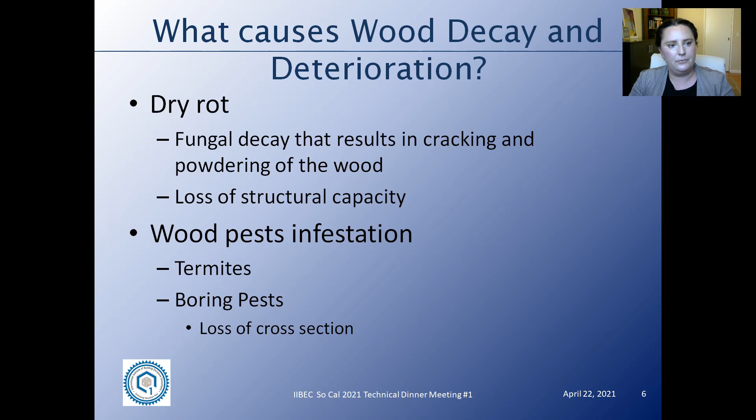So decay, dry rot, as it's less formally known, requires three different things to occur. It needs a food source, which is the wood itself. It needs water, and it needs fungal spores. So dry rot is actually a fungal infection that is eating away at the wood. And the main thing that really contributes to this is the presence of water. When we're talking about E3s, those are specifically wood elements on the outside of the building. And fungal spores are in the air. They're pretty much everywhere and are blown with the wind.

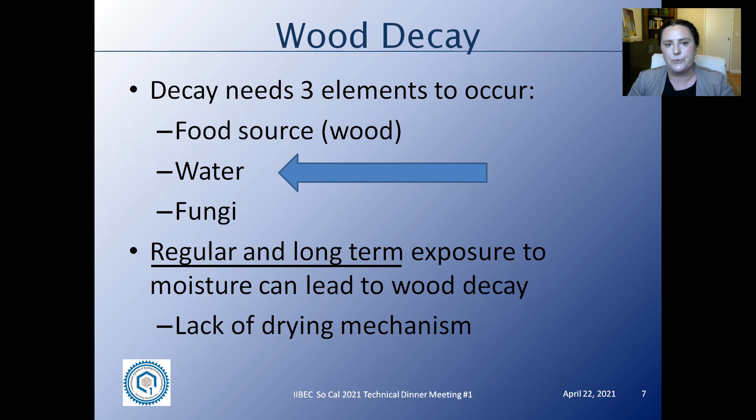So the main thing that we can control and that we can look for is the presence of water and moisture. Really it is regular and long-term exposure to moisture that can lead to wood decay. Essentially the wood needs to get wet and not be able to dry out quickly. If you just have an exterior wood fence that gets rained on but is able to dry as soon as the sun comes out, you're really not going to get dry rot and decay like you would in an enclosed condition. So these E3s get water in through some kind of small opening or hole, and they do not have a good drying mechanism. The water will stay for a long period of time and cause this fungal decay.

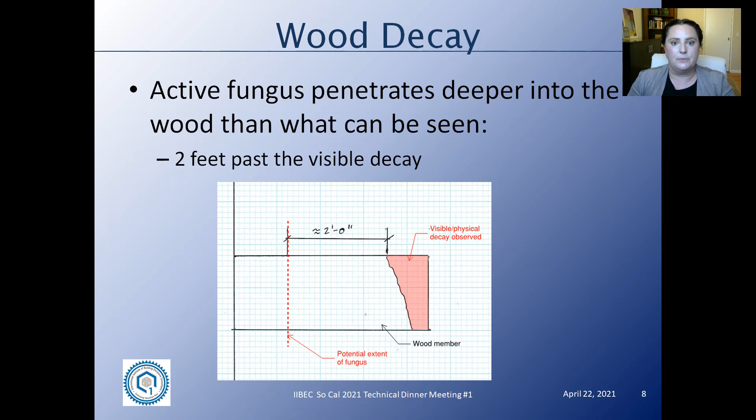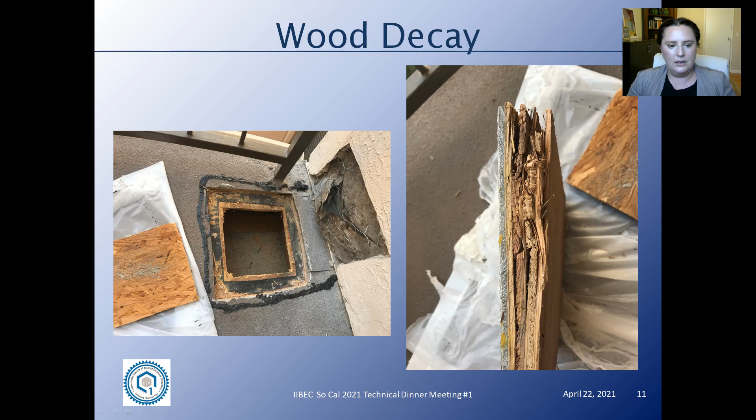So now let's talk about wood pests. There's lots of different types of wood pests. Main ones that we find here are termites and some boring beetles. They tend to be attracted to wet wood. And really, for these pest infestations, they need to be inspected by a certified professional. The certified professional will be able to provide treatment options for this.

But as inspectors, for the E3 inspectors, we can identify and look for some of the evidence that could indicate that there's a wood pest infestation. So the evidence really is termite waste, which is also called frass, and what I call wavy paint.

The termites like to get into the end grain of the wood, and they eat up through the end grain of the wood parallel to the wood. And so they'll eat underneath the paint a lot of times on the outside of the wood. And when they eat the wood and generate waste, it causes an expansion in volume, and it causes this kind of blistering that you can see in the paint. So I'll show some examples of that.

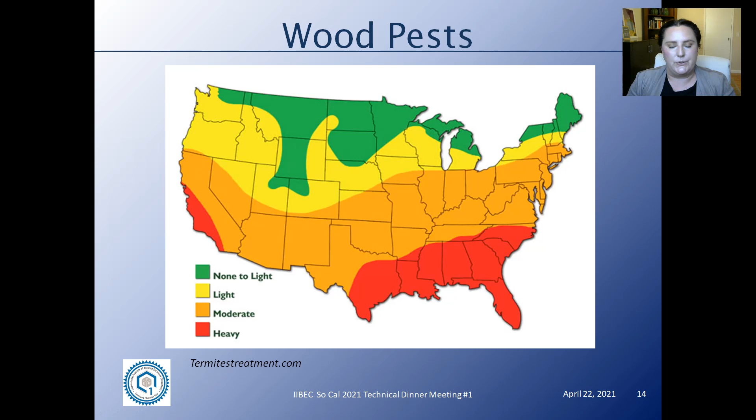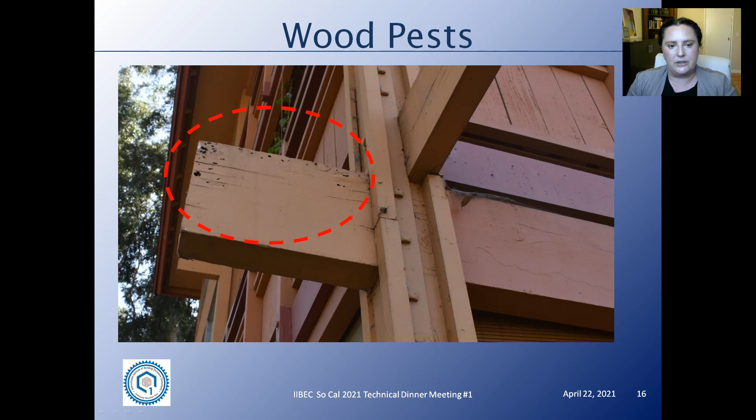Here's another good example. We've got some boring holes over here, and we've got a lot of paint flaking. And to the left, you can see the wavy paint areas. So these could indicate that there are actually termites that have gotten into this member and have eaten along the end grain and have caused little pockets of waste to form underneath the paint.

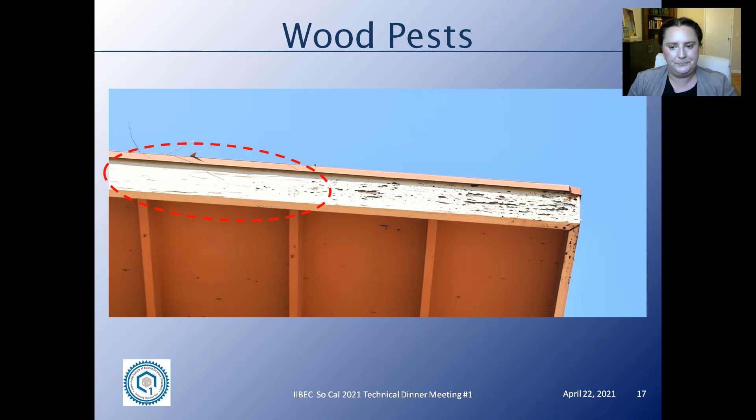And here's an example from my own house, actually, where the termites got in and ate up the end grain of this roof eave. And from the outside, it looks fairly normal. But as soon as you start cutting away, you can see that they've completely eaten away at the cross section. And this is how it weakens the wood, by removing actual cross section of wood. So you're losing that structural capacity from your wood members.

So now let's go into the basics of E3, particularly the framing of the E3 elements and how that relates to inspection. So what areas should you be concerned about when you're looking at these different elements, and what areas should you be paying attention to on a structural basis?

So there are several different framing techniques, and there's really a couple typical ones that we see for these exterior elevated elements. First is cantilever. So that is the element actually cantilevers out from the building. Second is simply supported, and that can be done in a multitude of ways. One could be possibly beam and post supported exterior elevated elements, or ledger and beam supported elevated elements.

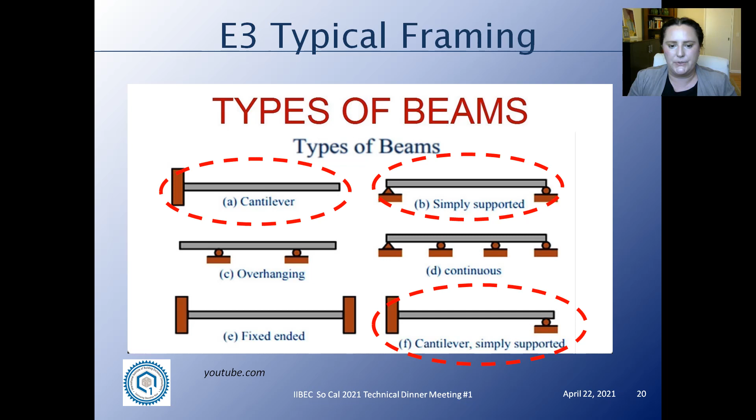And we also see quite a lot of cantilever and simply supported. So this is framed by cantilevering out from the building and then either a beam and post type support on the free end of the cantilever.

And when looking at the loading diagram on a cantilever, this is just a typical for a uniform distributed load on a cantilever beam. You can see that our max shear happens where the beam enters the building, so right at the support point at the building. And our max moment also happens at that point.

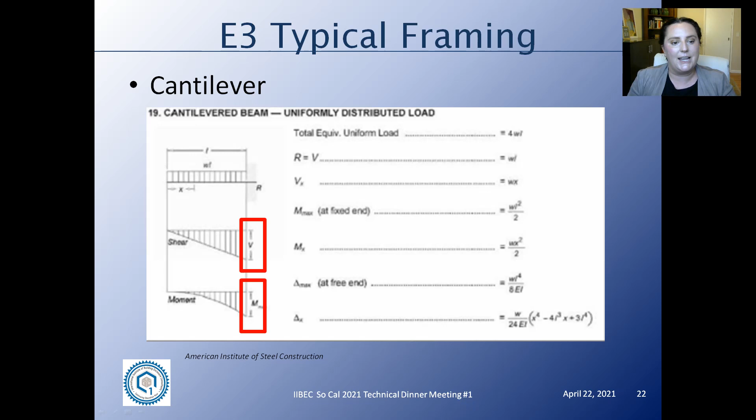So when looking at this from an E3 inspection type, we're concerned mainly with the structural capacity of the framing as it enters the building. If we have significant decay and deterioration where the beam enters the building at this point, we could have a very problematic condition, because that is where the highest load and the highest moment is happening within the beam.

So when you're looking at this type of framing, you should be concerned with where the supports are occurring, where the high shear loads are occurring, and where the moment occurs in the middle of the beam. One thing to note too is in terms of structural, right adjacent to where the support is, that's the concerned area, because your support is holding up this max shear here, but just to the left of it, just where the support ends, that's where you could have a catastrophic failure.

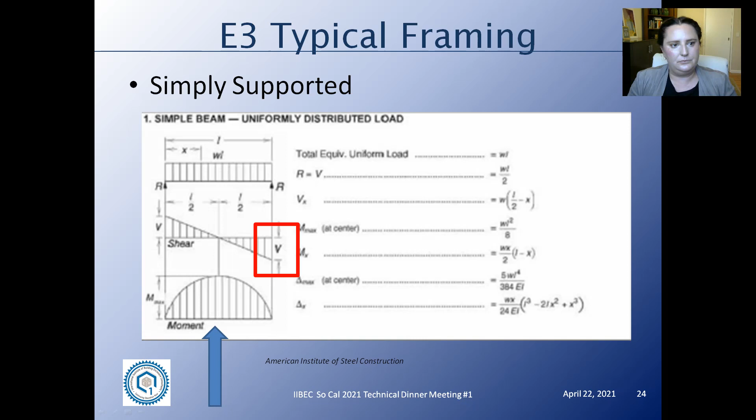And so when looking at the support and loading diagram for that, it's a little bit more complex. We have shear locations at the supports. We have high moment where the cantilever beam enters the building, but we also have a high moment in the middle of the span, and we also have a shear at the free end of the cantilever. So essentially, the more supports you have, the more complicated the structural framing is, the more areas you need to be concerned about when you're inspecting it from an E3 inspection point of view.

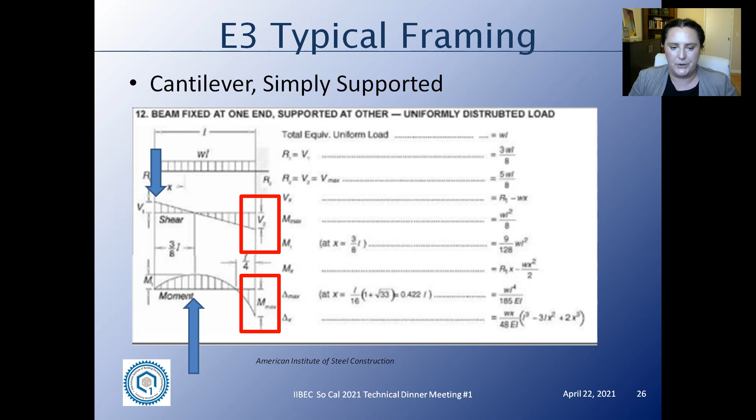The higher the amount of supports, you have an increase in redundancy. So in a cantilever situation, if you have cantilever joists fail, you have less redundancy to help keep the E3 element from collapsing. When you have multiple supports, things like simply supported or the cantilever and simply supported type situation, you have a lower chance of an extreme catastrophic failure because you have more redundancy in your support system.

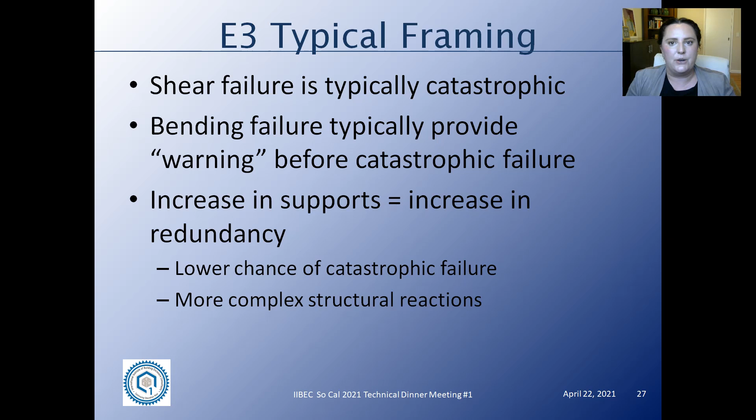Typically, when it comes to different types of failures, shear failure is considered more catastrophic. There's usually less of a warning provided on that. And a bending failure typically provides some type of warning before a catastrophic failure. So that means like extreme deflection in your joist, sagging, that kind of thing. So usually the bending failure is less catastrophic because you get a warning system, you can see it happening before you get an extreme failure.

So let's look at the different railings. These railings are also included in your E3 inspections, which we'll talk about a little bit more later. And they are considered part of the life safety. So a lot of times people lean on these railings. They're meant to prevent people from falling off of these balconies. So these are also very critical areas that need to be inspected as part of the E3 inspection.

So there's really two different kinds of framing for a railing system. There's the fascia supported or face mounted railing, where it's secured through the face of the balcony or the E3 element.

And so here's an example of a detail. And if we look at the loading on this and you push at the very top of the railing, it causes a moment down at the anchor points. And a moment also is considered a couple force, or it's a coupling force. So it results in a tension and compression force within the anchor of this framing.

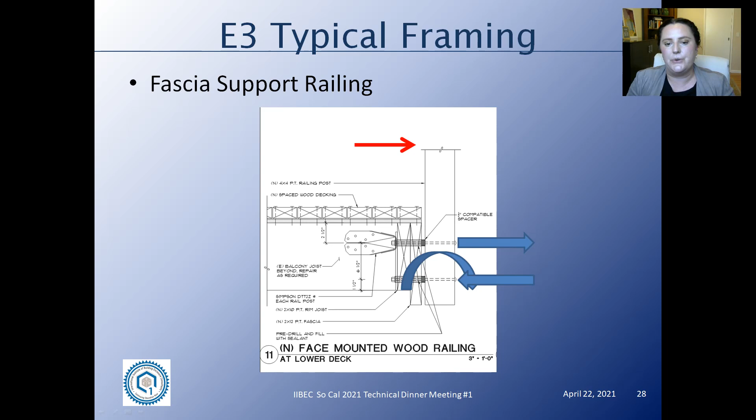So when you're looking at and considering where would the structural concern be on this balcony, you really want to look at these anchor supports here and the wood framing members that are connected to these supports. So if any of these wood framing or any of these anchor systems have some kind of decay and deterioration, that should be noted as a concern that needs to be addressed at some point.

And again, let's look at a top supported railing. This is the other style. Typically, this is done through base plates and individual post or a shoe type railing system, and it's secured through the top walking surface of the deck.

So structurally, when we look at this and we're pushing that railing over, it creates a moment down at the base, which results in a compression and tension force within the anchors itself. So again, we need to look at these anchor bolts and at the surrounding wood members that are supporting this railing to see if there's any decay or deterioration when looking at this.

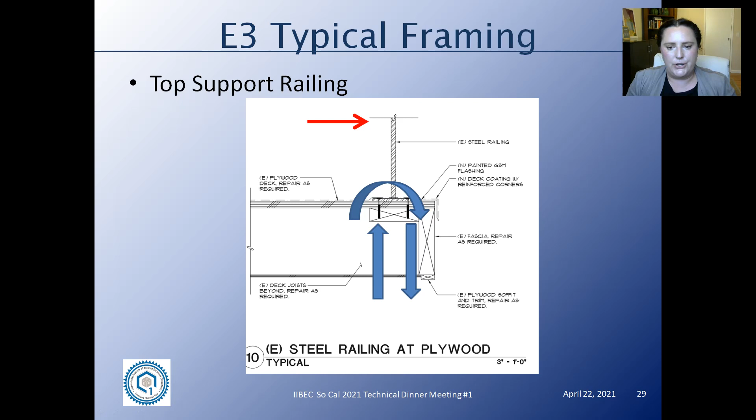One other item I want to note is that when we're looking at guardrails, we also need to look at the panels in the guardrails. So between the framing support post, the panels are there to prevent people, again, from falling off a balcony or going through a balcony. So those also should be structurally sound when we're doing these inspections.

So looking at the E3 typical framing, there's decking, which can consist of a lot of different types. There's either 1x2 wood decking, composite decking, which is still wood-based, plywood sheathing with a waterproofing layer and a concrete topping. Sometimes also I've seen tile topping, and plywood sheathing with traffic coating directly on the plywood sheathing.

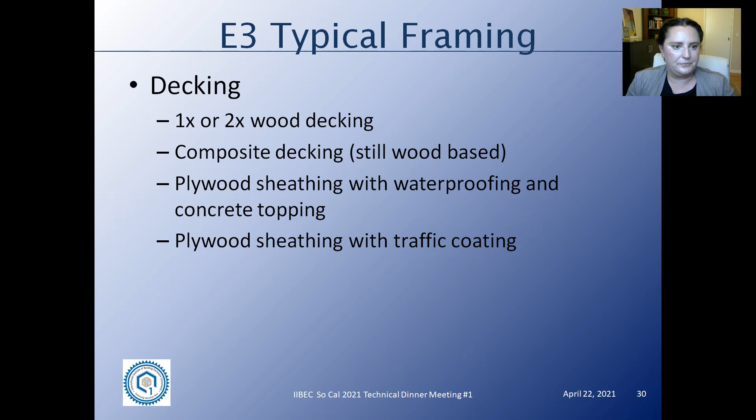Supporting members can vary as well. They're typically around 2x or 4x joist or 4x, 6x beams and ledger type situation. There could be post, 4x or 6x wood post with a concrete post-based foundation, or they could also be steel post. Those are not required as part of the SB 721 and SB 326 because they're steel. So we'll get a little bit into that when we're talking about the different Senate bill requirements.

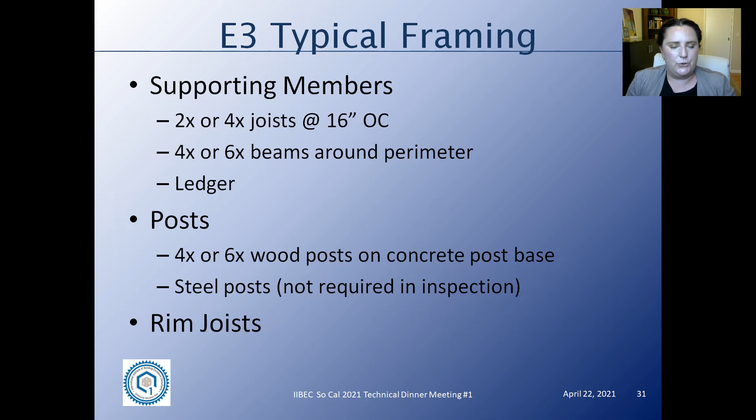Rim joists a lot of times are part of this. Fascia, blocking. If you're looking at stairs, you can have stair stringers, which could be 2x wood framing, and risers and treads, which could be 1x or 2x wood.

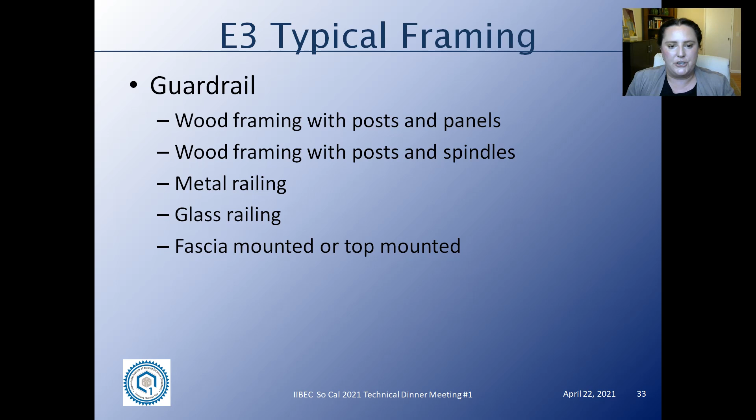Guardrail can consist of a lot of different types. Wood framing with post and panels, wood framing with post and spindles. You could have a completely metal railing, glass railing, and fascia mounted or top mounted typically is the framing part. There's lots of different connectors, joist hangers, nails, lag screws, bolts, etc.

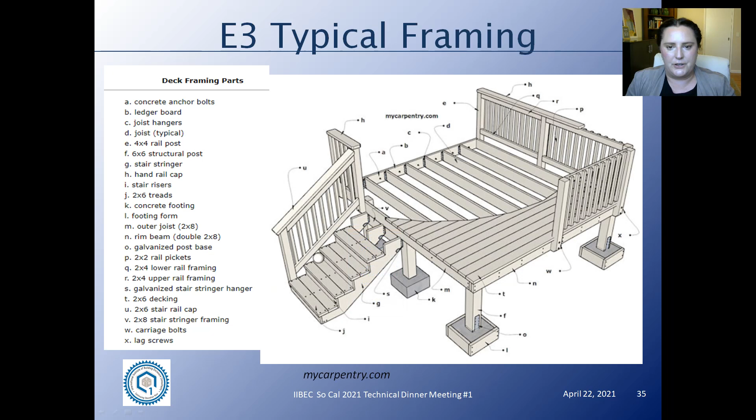And here's kind of a good diagram that shows all the different types. As you can see, this guardrail is fascia or face-mounted guardrail. It's a post and beam type framing situation with post base, foundation. This is the ledger in the back here where the joists are hung off of. So that's the basics of framing and kind of the structural basics of how these E3 work.

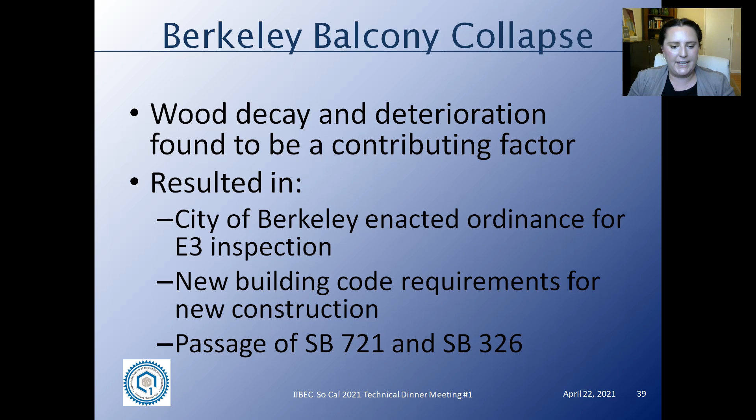The first thing was the City of Berkeley enacted an ordinance for E3 inspections. There were new building code requirements for new construction that was enacted in the 2017 emergency addendum and is now fully part of the 2019 California Building Code. And it resulted in the passage of Senate Bill 721 and Senate Bill 326.

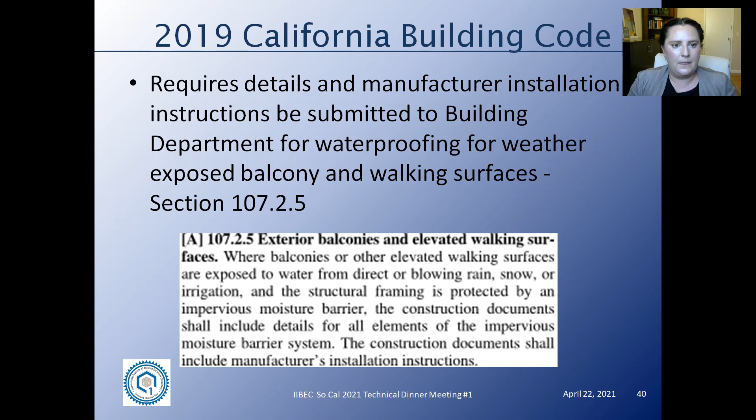So let's briefly look at what the new code requirements are for new construction. So it requires details and manufacturer installations for waterproofing for the weather-exposed balconies and walking surfaces to be submitted to the building department. It also requires either a building official inspection or a special inspection for the waterproofing portion of weather-exposed balconies. And the municipalities can either include it as part of the building inspector's job or require special inspections. And we have actually seen some municipalities enact special inspections.

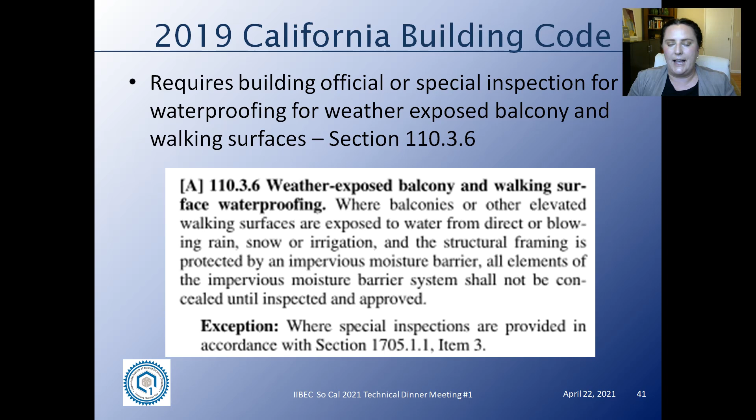And those special inspections are required under Section 1705.1.1, Item 3, which requires materials and systems to be installed in accordance with manufacturer's instructions that prescribe requirements not contained in this code. It now requires venting in enclosed soffits underneath balconies and exterior elevated walking surfaces.

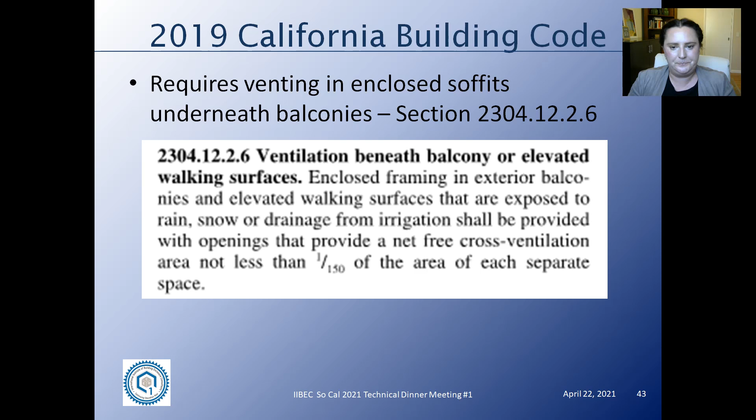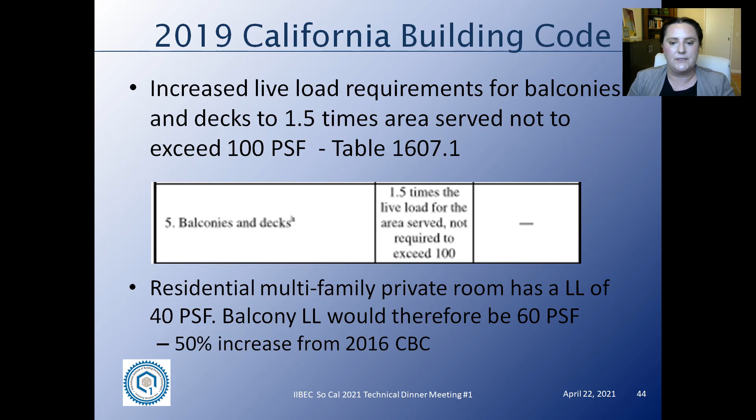And finally, it resulted in SB 721 and SB 326. So these are 2 Senate bills that were passed to require regular inspections of exterior elevated elements. First, we're going to go into some definitions. So what is an exterior elevated element?

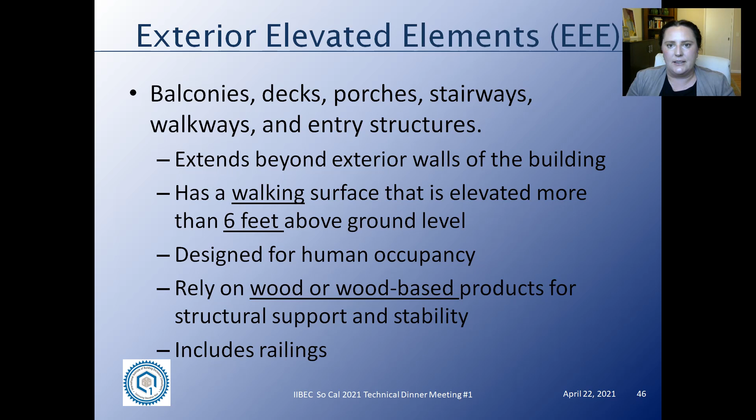This includes balconies, decks, porches, stairways, walkways, and entry structures that extend beyond the exterior walls of the building, has a walking surface that is elevated more than 6 feet above ground level, is designed for human occupancy, and it relies on wood or wood-based products for structural support. Railings and guardrails are also included in these EEE elements, even if they are not wood-based. So if you have a metal guardrail on a wood-based exterior elevated element, then that is considered part of the Triple E.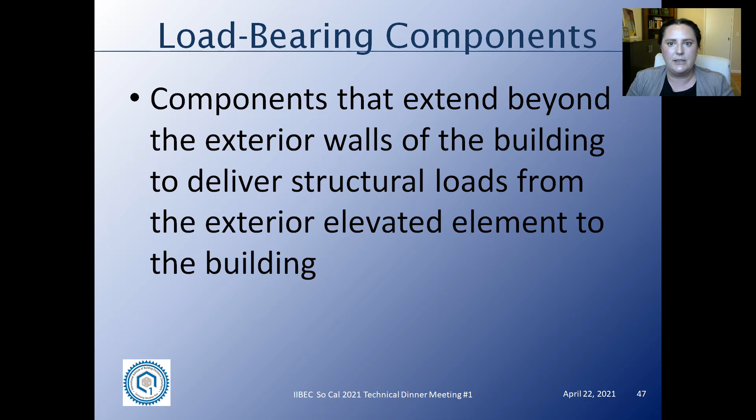And then what are load-bearing components? These are components that extend beyond the exterior walls of the building to deliver structural loads from the EEE to the building. So that's all the structural framing that holds up these EEEs. And associated waterproofing elements is defined as items that protect load-bearing components of the Triple E from exposure to water and the elements. So this is flashing, membranes, coatings, sealants, etc.

So first, let's look at Senate Bill 721. So this was passed in 2018, and it requires inspection of Triple E's of multifamily residential buildings with 3 or more units. This excludes common interest developments, so condos and co-ops, etc., are excluded from the SB 721.

And as a direct quote from the bill, the purpose of inspection is to determine if the Triple E's are generally in safe condition, adequate working order, free from any hazardous condition caused by fungus, deterioration, decay, or improper alteration to the extent that the life, limb, health, property, safety, or welfare of the public or occupants. So that is the main purpose of this bill.

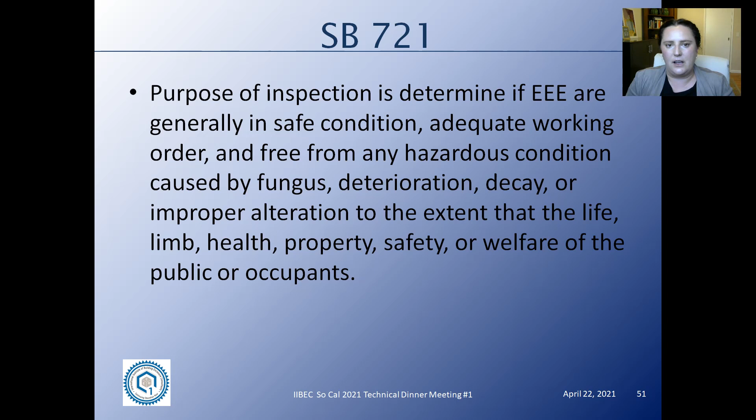It requires a minimum of 15% of the load-bearing components and associated waterproofing elements of the EEEs to be inspected on a building. The report is due to the owner within 45 days, and the owner is to keep a copy of that report for 2 inspection cycles. And it should be noted that the report timeline does not matter how many EEE elements are inspected. If you inspect 3 balconies or 300 balconies, you still need to give the report to the owner within 45 days.

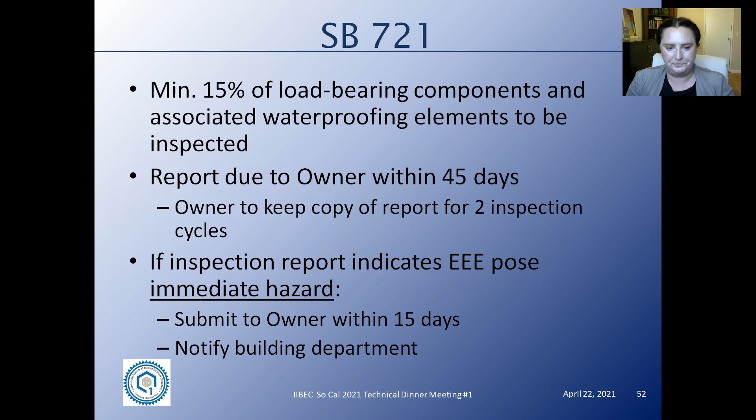If the inspection report indicates that one or any of the triple E's pose an immediate hazard, then you need to submit that immediate hazard report to the building owner within 15 days, and you also need to notify the authority having jurisdiction. These inspections can be performed by a licensed architect in the state of California, a licensed engineer from the state of California, a licensed contractor with an A, B, or C5 license with a minimum of 5 years experience, or a certified building inspector.

The inspections need to occur every 6 years, so this is an ongoing maintenance item that building owners need to do. And the first inspection needs to occur by January 1st, 2025. And the inspection entails a quote-unquote visual inspection of load-bearing components and associated waterproofing elements of the EEEs.

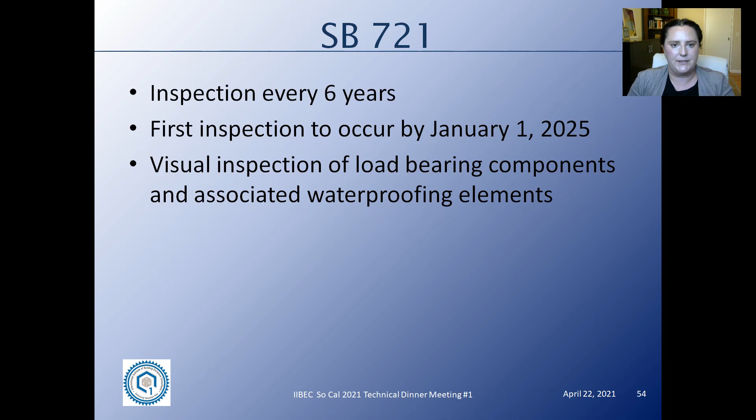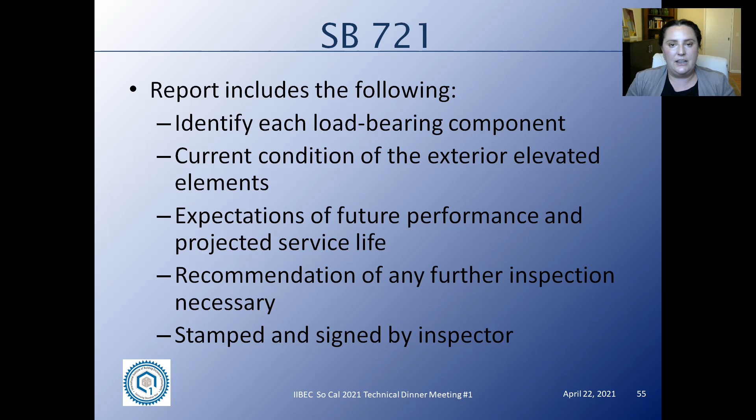The report needs to include the following. Identify each of the load-bearing components, so a diagram of the structural framing is a good idea. It needs to say what the current condition of the EEE is, expectations of future performance and projected service life, recommendation of any further inspections, and it also needs to be stamped and signed by the inspector.

It also needs to include photographs, test results if you do any kind of testing on these elements, and a narrative of what was observed and what was inspected. And if any of the EEEs pose an immediate threat to the safety of the occupants, the inspector in the report needs to indicate whether restricting access or temporary shoring is necessary.

Following these reports, if there's any immediate hazards noted, then the owner needs to immediately start repairs or actions to limit access to that EEE. Any corrective work identified in the report needs to be completed within 120 days of an approved permit. If the owner is not compliant within 180 days, there are fees that can be implemented by the building department.

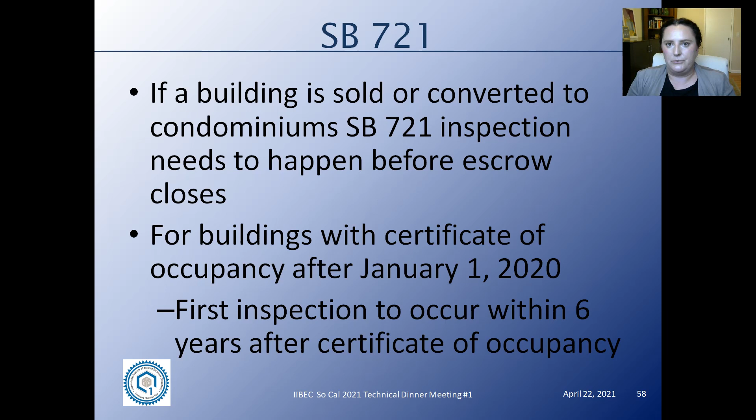If a residential building is sold or converted to condominiums, the SB 721 inspection needs to happen before escrow closes. And for buildings that were built after January 1st, 2020, the first inspection needs to occur within 6 years of the certificate of occupancy. So this is something to note too. The age of the building does not matter for 721. Even brand new buildings are going to require these regular inspections to occur.

So now let's look at 326. 326 was passed to close the gap that 721 included with respect to condos and common interest developments. So 326 is the same EEE inspection requirement for common interest developments. This was passed in 2019. And again, it's inspection of the EEEs of multifamily residential with 3 or more units. So if you have a duplex, it's not considered part of this requirement.

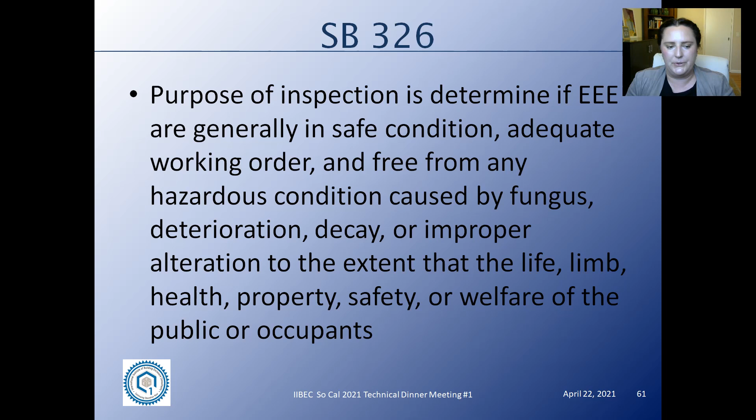Again, the purpose of the inspection is to determine if the EEE is generally in safe condition, adequate working order, and free from any hazardous conditions caused by fungus, deterioration, decay, or improper alteration. A little bit different: the amount that needs to be inspected is a random, statistically significant amount. That means the amount that can provide 95% confidence with a margin of error of plus or minus 5%. So this Senate bill leaves it up to the inspector to determine how much needs to be inspected as part of their professional judgment to provide 95% confidence.

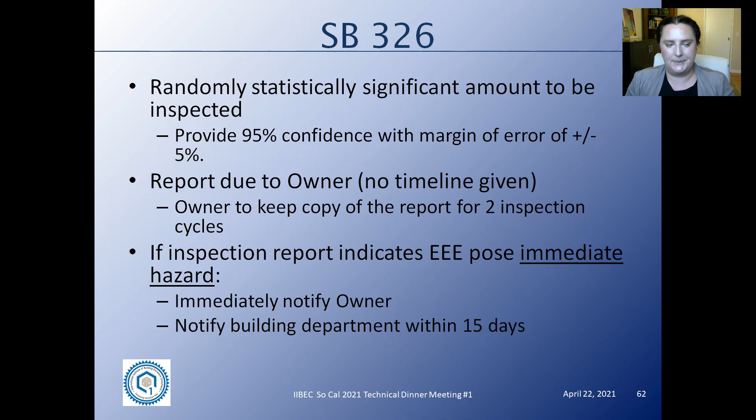The report is due to the owner. However, there's no timeline given, and the owner is still to keep a copy of the report for 2 inspection cycles. And by owner, I apologize, I mean HOA or board. If an inspection report indicates the EEE poses an immediate hazard, you need to immediately notify the owner and notify the building department within 15 days. These inspections can be provided by a licensed architect or a licensed engineer in the state of California. The inspection cycle is every 9 years, and the first inspection is to occur by January 1st, 2025.

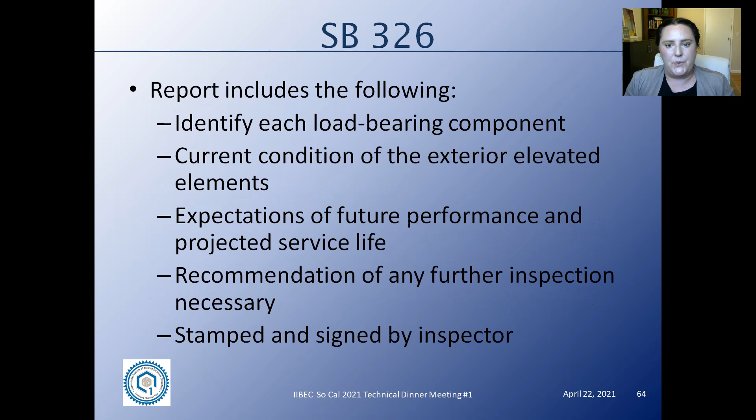And again, it's a, quote unquote, visual inspection of load-bearing components and associated waterproofing elements. And the report requirements are the same as for 721. And again, if any EEEs pose an immediate threat to the safety of the occupants, the inspector or the report writer needs to indicate whether restricting access or shoring is necessary. Following the report, repairs or actions need to happen immediately to address the hazardous conditions, so the immediate threat

to life safety conditions. For condominiums with a certificate of occupancy after January 1st, 2020, the first inspection has to occur within 6 years of the certificate of occupancy. So like 721, for 326 the age of the building does not matter. Brand new buildings will also need to follow these inspection requirements.

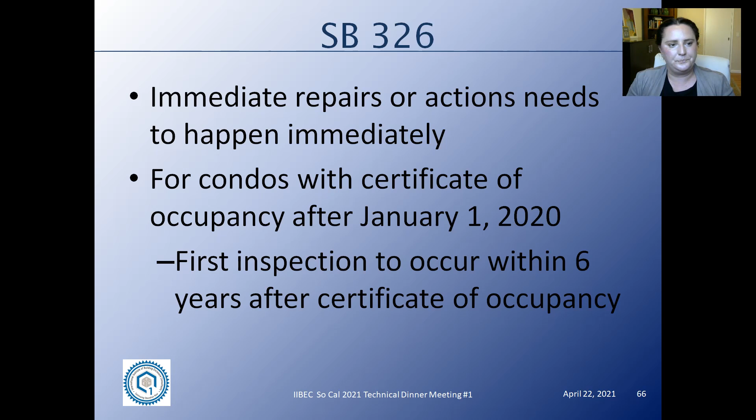So let's look at the main differences between 721 and 326. 721 is for multifamily residential of 3 or more units, excluding common interest developments, excluding condos. A lot more people qualify as inspectors under 721. You could be an architect or engineer or a GC or certified building inspector. The cycle's a little bit quicker, at 6 years, and there are timelines of when the report's due to the owner and when the owner is required to make repairs. And it also requires a 15% minimum inspection.

326 is specifically for condominiums and common interest developments. It limits the people who are qualified to be inspectors to just architects and engineers. The inspection cycle is every 9 years. There's really no time limit unless there's an immediate threat identified. And the amount of inspection is really left up to the professional judgment that will provide a 95% confidence with plus or minus 5% margin of error. So essentially you have to be a statistician to determine how much of the E3s you need to inspect.

One thing to note for both 721 and 326 is if problematic conditions are observed, then you are required to do additional inspections. The amount additional is left up to the professional. So if you inspect 100 balconies and 50 of them have problematic conditions, you as the professional need to determine how many more you want to inspect. It could be you now require full inspection. It could be now you only need to see an additional 2 or 3. It is left up to your professional judgment.

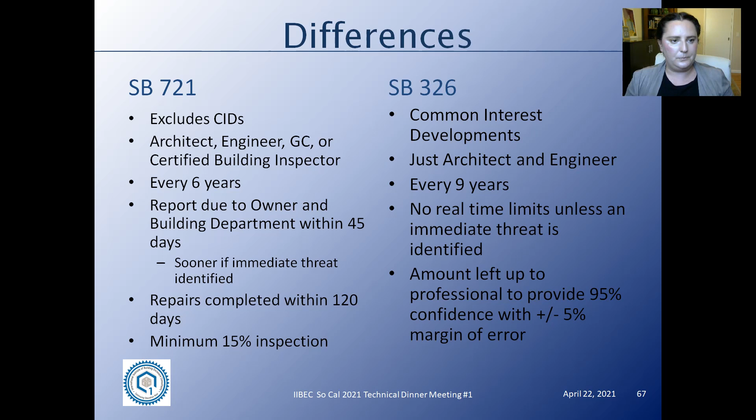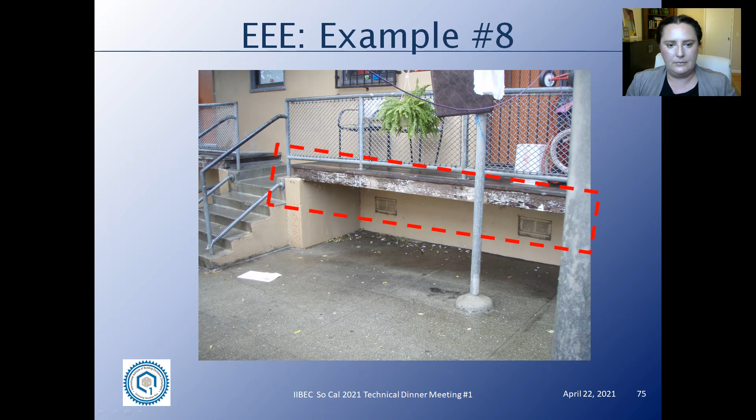And here's a great diagram. This is from the City of Berkeley E3 inspection program. This diagram shows that these balconies and guardrails that are extended out are part of the E3. Same thing with this stairway here. You can see this stairway is not because it's indicated as less than 6 feet. And also note, these roof decks that are over occupied space are not part of the E3 requirements. One thing that's different about the City of Berkeley is that they also include steel framing within their E3s, whereas the 2 Senate bills are purely for wood framed or wood-based products.

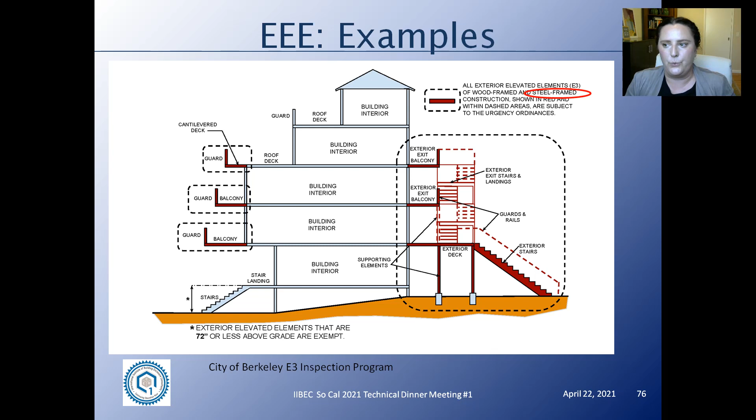So a couple tips when proposing inspection work and keeping your owners and clients informed. I would inform the owner that you're going to need access to both the top and the underside of the triple E's. You need to look at both the framing of the balconies and the exterior walking elements, and also look at the decking and the guardrails on top as well. So typically that means you're going to need access to the underside, and you're possibly going to need access through units in order to get to the top side of these decks.

You may need to perform DT to review the load-bearing components. So if you have an enclosed soffit, the only way that you're going to see the load-bearing components is if you actually get in there, so it's going to require opening up some of these areas. And just keep in mind too, this has to happen on a 6 or 9 year cycle. So you're going to need to do these DTs every 6 or 9 years, depending on the construction you have.

One thing to note too, when performing due diligence or property condition assessment, inform the owners of the building that it's going to require regular inspection based on the 6 or 9 year cycle because of these Senate bills.

You also want to indicate to the owner or HOA that they may need to carry a budget to perform immediate or emergency repairs. So as soon as you do this inspection and you indicate that there is an immediate hazard to the life and safety of the people in the building, the owner has to immediately begin working on it. So that could be restricting access to the units, providing shoring, and then they have to start immediately working on a repair schedule. So they need to not only carry the budget for the inspections, but understand that there's likely going to be some repairs that happen.

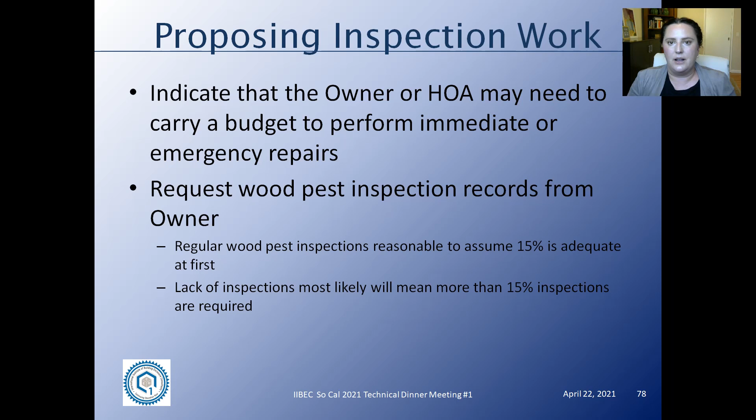I went to a wood framed construction seminar a couple years ago, and there was a wood pest expert there, and he recommended getting an inspection every year. And so at my personal house, I have started getting a termite inspection every single year. And every year there are termites that need to be treated. It's just a constant issue that we have to deal with in California.

So now let's go into the means and methods of doing these inspections. So the number one question I get on these inspections, particularly if you have an enclosed soffit: do we need to probe and do we need to do destructive testing in order to remove the soffit to physically probe the structural members? There are people out there and there are companies that say that they can basically drill a small hole and use a borescope to look at the framing. And technically, the Senate bill does say it's a visual inspection. However, I'm going to give some examples as to why I think you need to probe.

What I did is I zip tied a probe to the end of a broom handle in order to be able to get underneath the balcony and probe from underneath. This saves needing a ladder to bring everywhere. It's a little bit safer not having to climb ladders, and it works pretty well to make your inspection go a little bit faster. I will note too, if you're going to be doing probing, I definitely recommend eye protection, because if you probe a wood member and you get termite pellets falling out, I've learned from experience that they can get into your eyes.

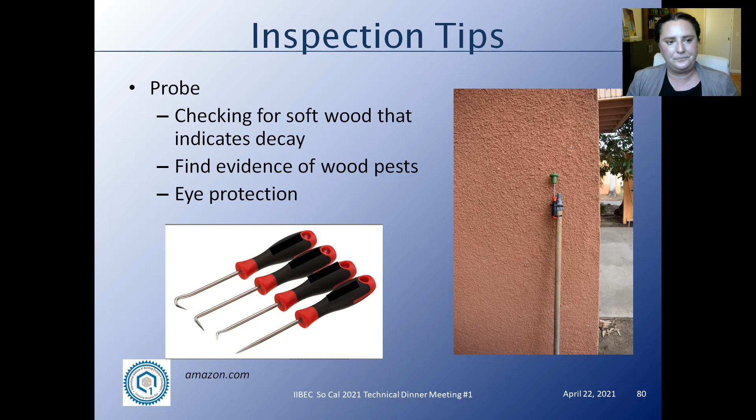So why do we probe? If you look at this photo here, this photo was provided by Tracy Myers of Myers Consulting. Thank you to her. This is a cantilever wood joist. And if you ignore these previous probes and you look at this joist, it looks like it's in pretty pristine condition. Just visually, I don't see any issues really with it. But as you can see, this is a probe that's inserted 4 to 6 inches into this wood. That is how much this joist has decayed. So just visually looking at something, you're not really going to be able to tell the condition of that wood unless you probe.

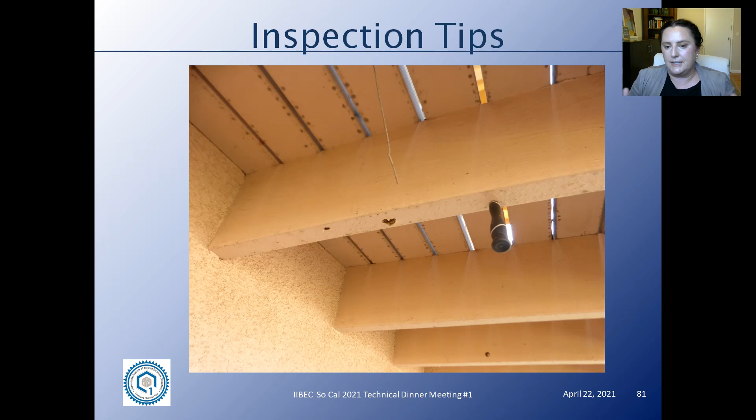So then I also recommend checking the guardrail. This is very important as the guardrail provides a life safety measure. First, I shake the guardrail, see if it's loose. If it's loose, you can pretty much guarantee that either the connections, the anchor bolts, are deteriorated or the wood that's holding the anchor bolts is soft and deteriorated as well. If the wood surrounding the anchor bolts has lost some of its structural capacity, your anchor bolts now do not have solid wood to grip onto. So your guardrail will be loose.

Also check the guardrail panels. As I mentioned before, panels are there to provide a structural barrier so that people or things can't fall off these balconies. Check for soft spots in the decking. So when you walk around, feel for soft spots and bounciness within the decking itself. If you have plywood sheathing with a traffic coating, look for cracks and seams within that traffic coating and then the plywood, as those are the first areas that generally will fail and cause water to be able to get in.

If your balcony slopes to some kind of area drain or is supposed to sheet drain off the edge, check for sloping, because if you have water ponding on your balcony in specific areas, that could indicate that one, you have decay in your framing underneath that has settled and allowed for ponding to happen, or two, it was built that way and now you have water buildup in specific areas that could lead to decay and deterioration.

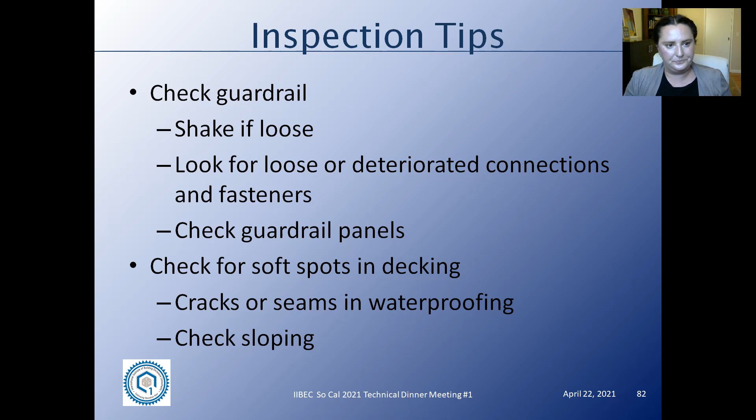90% of leaks occur from 10% of the waterproofing. So that really talks about how most leaks occur around the perimeter conditions and around penetrations. Pay special attention to seams and sheet metal flashing. Sheet metal flashing is used a lot in these balconies as either perimeter flashing, saddle flashing, drip edge flashing. And while the sheet metal itself is waterproof, the seams generally are not treated or constructed very well. And when the seams start to pull apart, that's how water can get in underneath sheet metal flashing. And since sheet metal flashing is so waterproof, it can keep water in there for long periods of time and lead to the decay that we see.

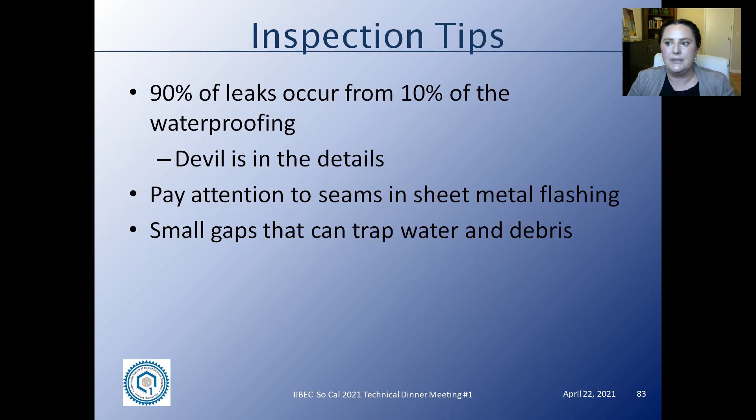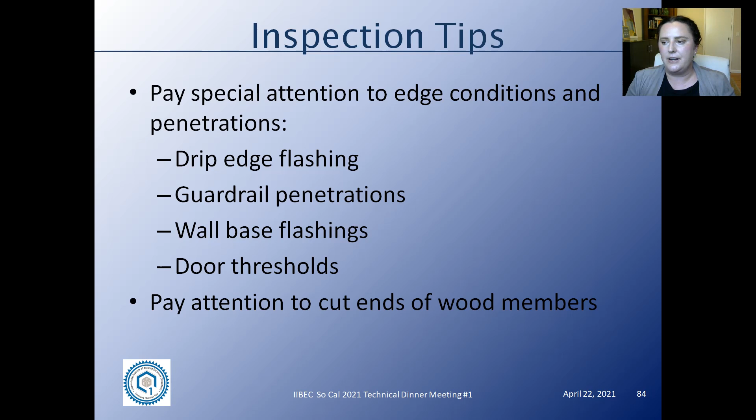Look for small gaps that can trap water or debris. These small gaps are very pernicious because they allow water in, but it's hard to get water out once it's in these small gaps. As I mentioned, pay special attention to the edge conditions and any penetrations. And then finally, pay attention to cut ends of wood members. Dry rot and termite infestation typically get into the end grain of the wood. So if you have a cantilever joist, typically the decay and the termites start at the free end of the joist and work their way through.

So let's look at some examples of problematic conditions. Here's an example of soft decking. This is again a probe that completely went through the decking here. This area was an area of concern because everything on this balcony sloped to this area, and you can see lots of debris caught in the end pieces here. And one note on debris and leaves: one, they attract bugs, and two, they easily trap water. So all of these leaves and dirt can get wet and sit there wet for long periods of time against the wood.

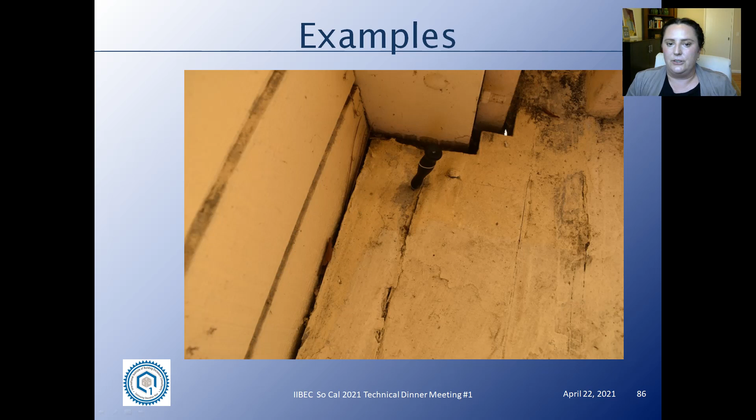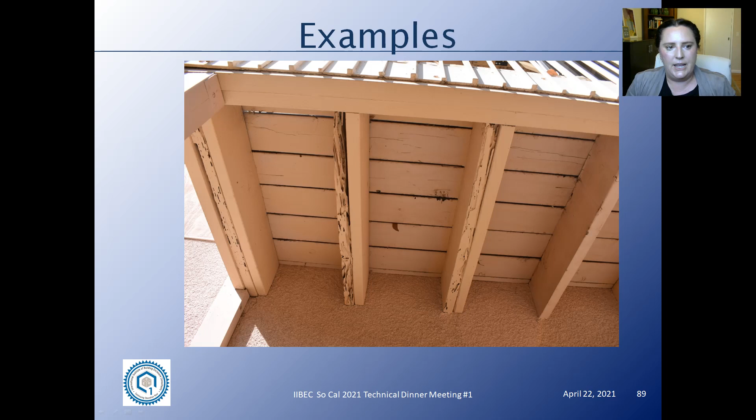Here's an example of what termites can do. They get into the end and just eat their way through the joist here. This balcony was retrofitted at one point and supported by posts and beams. But the balcony above is also completely destroyed by termites, and there really is no post and beam support on that balcony above. Here's an example of the wavy paint, an indication of termites. When I probed this, a lot of drywood termite pellets came out.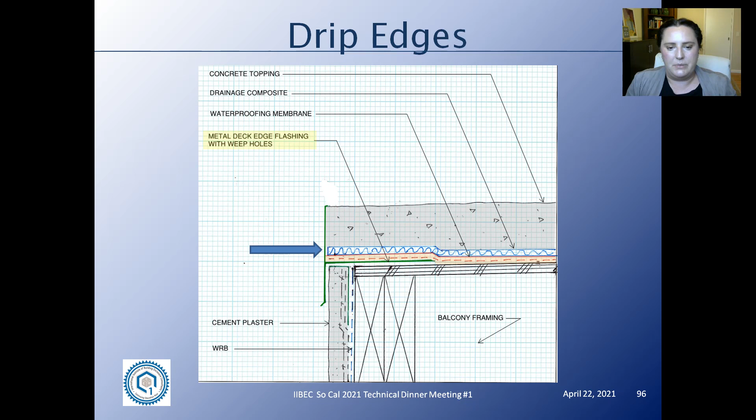And once your weep holes are now blocked, you can have a buildup of water within your system, and that buildup tends to find the next weakest point. So you could have a small crack or penetration somewhere in your system that can allow water in because we have this buildup and it is not able to easily drain.

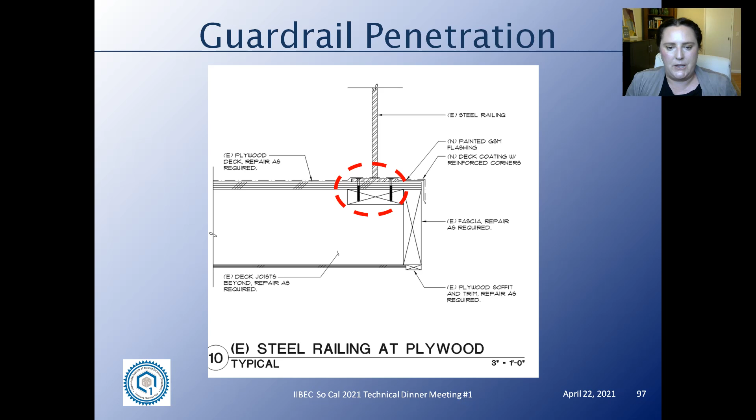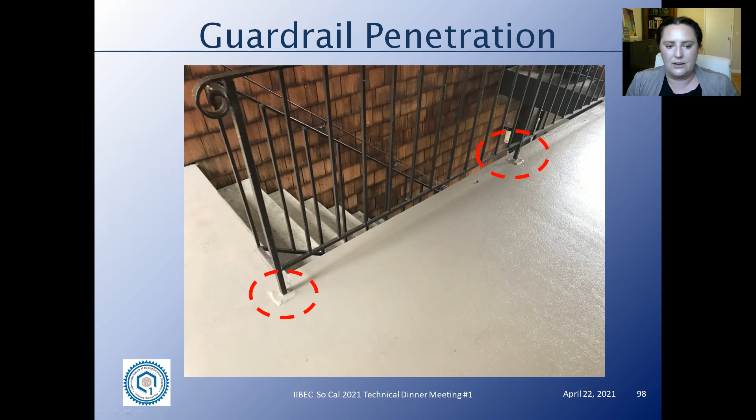Another area that tends to be problematic is top-mounted guardrails. So, these are a lot of sharp transition edges that happen, and you can have a lot of differential movement and expansion-contraction movement between your balcony guard railing and your adjacent wood members. So here's some example. These are areas that should be paid particularly close attention to when you're doing E3 inspections, because these are types of areas that can tend to fail and allow water to penetrate.

Another area is door thresholds. So again, it is because of sheet metal flashing. So this is a sill pan that extends out and the traffic coating extends onto the sheet metal. This is a weak area that'll fail at one point throughout the age of the building and could allow water to come in.

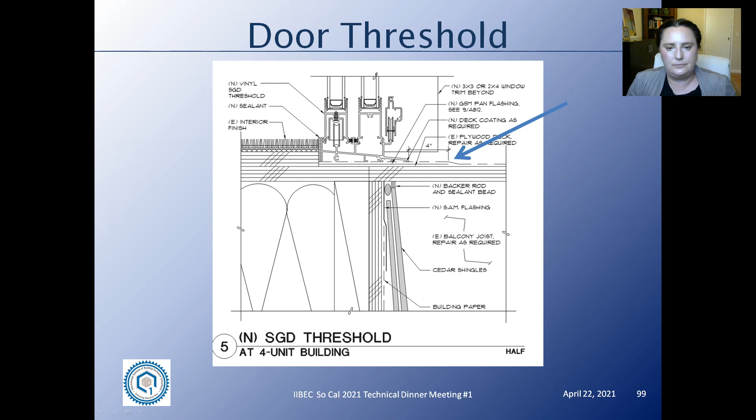And same thing with wall base flashings. A lot of times these wall base flashings are sheet metal L angles, and we can have a weak point right where the sheet metal L angle transitions to the plywood. We can also have a weak point if the wall waterproofing is not adequate. I have seen locations where this wall base flashing is completely deteriorated because of water from above, and so now we have a very vulnerable spot right at this transition.

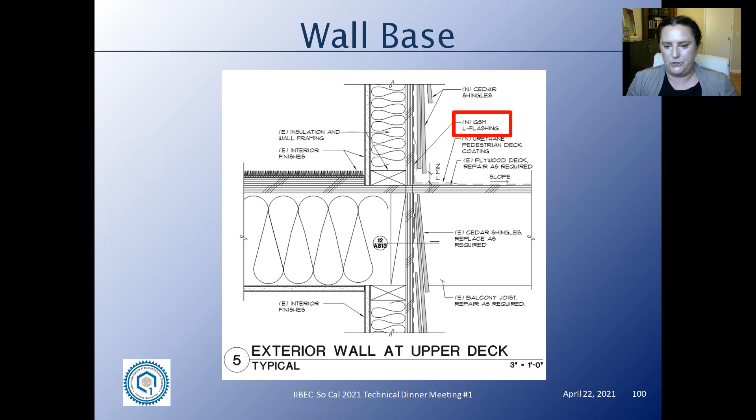Saddle flashing is another one, or lack thereof saddle flashing. So looking at this balcony edge here, we have the drip flashing that just finishes right at this edge here. And so now we have a vulnerable hole there and another one from above. And you can actually see in this photo too that someone had applied sealant at some point to this edge. Usually if you see sealant globbed on like that, that's an indication that they've had issues there and they're trying to deal with it at some point.

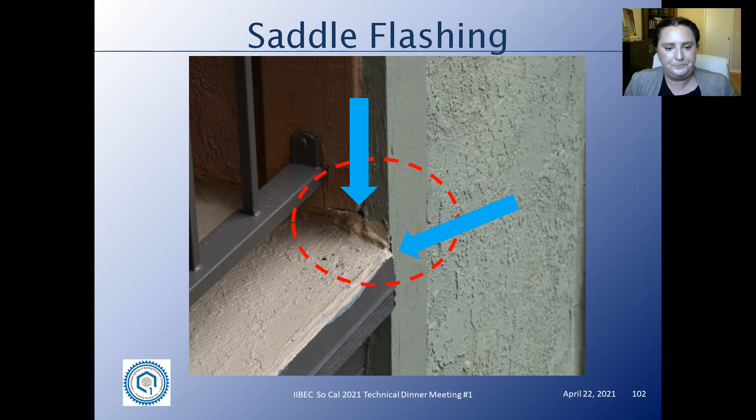So now finally, let's talk a little bit about design recommendations. So these design recommendations are not based off of weatherproofing or waterproofing. You do want to have good weatherproofing and waterproofing to protect your balcony and protect your wood framing. These design recommendations are purely based off of the anticipation of having to do these inspections on a regular basis.

Two of the biggest things that I see that are a hindrance to us doing these inspections are, one, enclosed soffits and the type of framing, structural framing that's used. It makes it sometimes very difficult to either inspect or to make repairs on something.

So one design recommendation is to consider not doing an enclosed soffit anymore, to just use open framing. If you do an enclosed soffit, you have to expect that you're going to need to do DT on that enclosed soffit on a regular 6 to 9 year basis in order to do these inspections. The issue with that is there's some fireproofing requirements. So for exterior walking surfaces, they need to be fire protected. One way to do that is automatic sprinklers, or to limit your building to the type 5B building type.

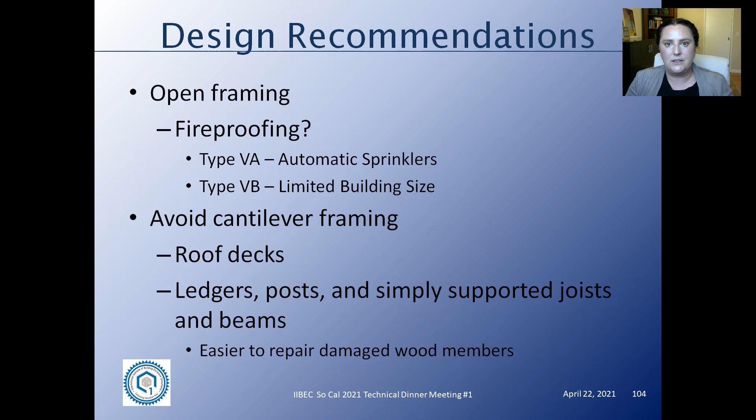One other thing to avoid having to do these inspections altogether is to no longer do any kind of exterior elevated elements and just make everything a roof deck over occupied space. There is a problem with that because now you've increased the risk on those systems. By having a roof over occupied space, you now have a much higher risk of waterproofing damage to the interior because you are now over occupied space. So that is just a risk trade-off that you need to consider during your design.

If you have to use enclosed soffits, I'd recommend installing access panels. And these access panels need to be large enough to allow probing to happen on your joist. Another thing you could do is avoid wood or wood-based framing altogether and just use concrete or metal framing. There might be also some fireproofing requirements that are needed for the metal framing.

And then the last thing is just a good maintenance item for building owners to do is to do regular termite and wood pest inspections. That way you can catch some of these wood pest infestations early, and generally the repairs for that are much, much faster and easier to do.

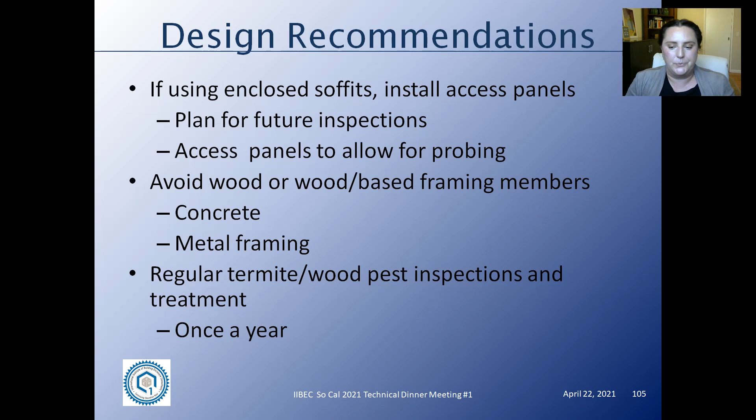So to conclude, E3 inspections are going to become a large part of the building enclosure and architecture and engineering work. This may begin to extend into other areas of the construction world. If we have more failures, let's say, of a roof deck, the roof decks might become included in part of this inspection as well. So just consider that this is something that could potentially get bigger and bigger and bigger.

Distinguish between whether or not you need to do 721 inspections or 326, as there are some differences that can be pretty significant. And then finally, the bills rely heavily on your own professional judgment. So you as the inspector need to sign and stamp these reports. And so you need to use your professional judgment. What are you comfortable with for the owner to understand?

So going back to the question of whether or not a borescope is adequate or if you need to probe, me as a professional, I would require that we need to probe, because I've seen enough issues where visually something looks fine and it could be significantly deteriorated that you just can't see, and you can only indicate through probing. So if I'm going to sign and stamp a report, I'm going to require that we do some type of probing. So it does rely heavily on that.